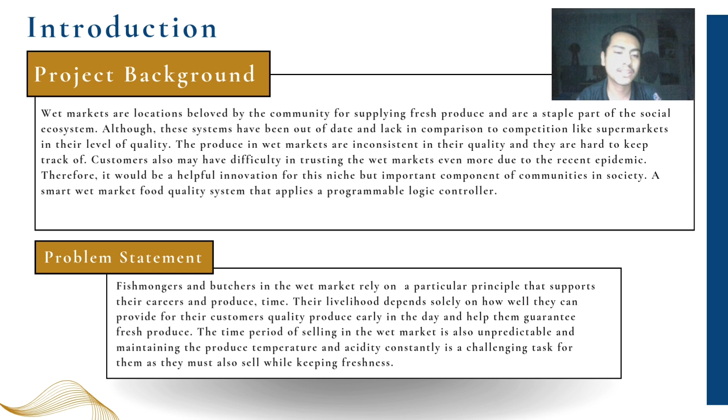The time period of selling in the wet market is also unpredictable, and maintaining the produce temperature and acidity constantly is a challenging task, as they must also sell while keeping freshness. Now moving on to the objectives. The first objective is to monitor the shelf life and condition of the wet foods throughout the operating hours by implementing temperature and acidity sensors. The second objective is to notify the trader of the shelf life and condition of the wet foods by installing alarms based on the conditions of the wet foods.

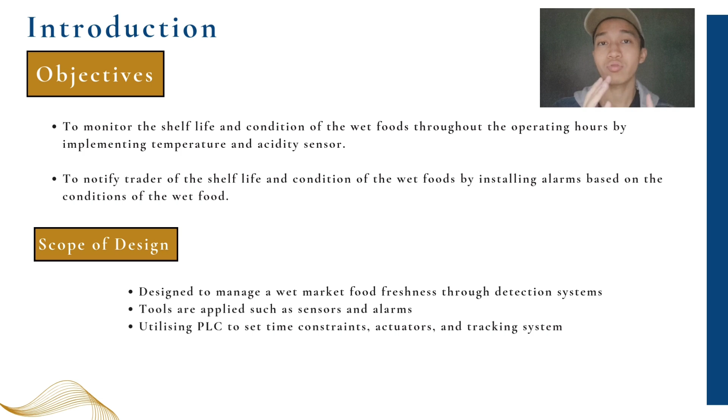Now, diving into the scope of design. This project is designed to manage wet market food freshness through a detection system in the holding area of the meats. The tools applied are an acidity sensor, a temperature sensor, along with alarms for each sensor and for the whole system, also utilizing the PLC to set time constraints, actuators, and tracking systems to ensure the freshness and quality of wet market produce.

There are 4 different capabilities of the smart wet market food quality system. The first is it can detect temperature change and dispense ice to cool down the wet food or ingredients. Next, it can detect the pH value of the wet foods or ingredients, which will trigger the pH alarm and notify the trader or owner when the pH value is too low.

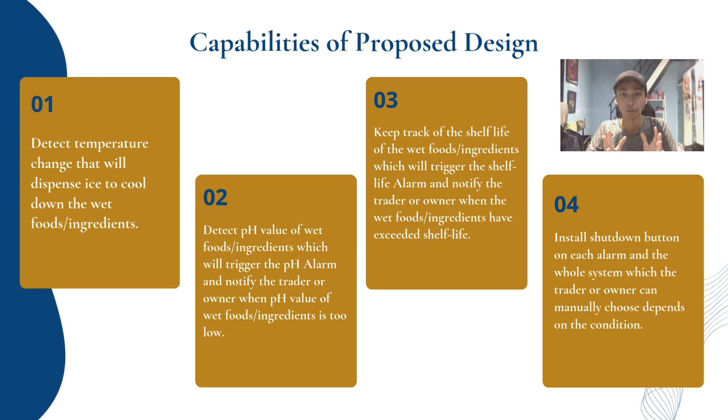Next, it can keep track of the shelf life of the wet food or ingredients, which will trigger the shelf life alarm and notify the trader or owner when the wet food or ingredients have exceeded shelf life. Lastly, it has a shutdown button on each alarm and the whole system, which the trader or owner can manually choose depending on the condition.

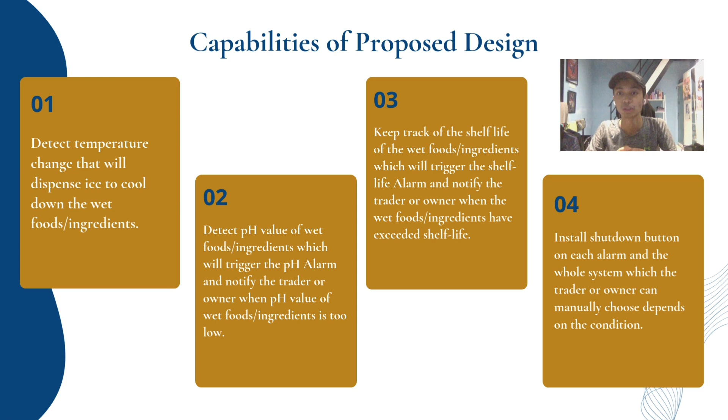There are 2 different parts of the literature review that we're going to look at. The first is the programmable logic controller, also known as the PLC. A control system must be developed so that the automation part is easily programmable, versatile, durable, and cost-effective. PLCs are computer-based, single processor devices that emulate the behavior of an electrical ladder diagram. PLCs are capable of controlling many types of industrial equipment and entire automated systems.

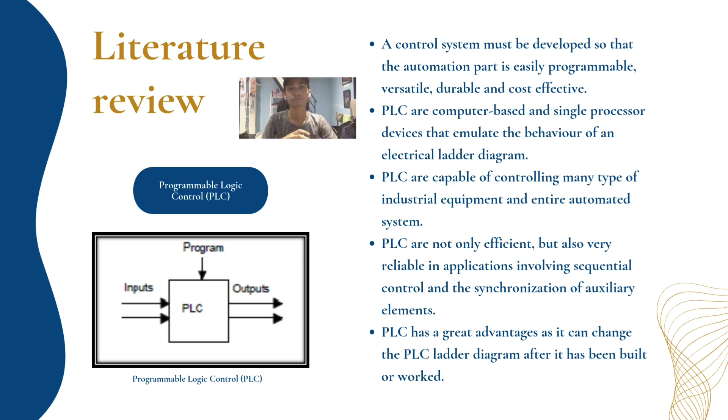They are not only efficient but also very reliable in applications involving sequential control and the synchronization of auxiliary elements. The PLC has a great advantage as its ladder diagram can be changed after it has been built. The next part of the literature review is actuators. There are 3 different types of actuator: electrical, hydraulic, and pneumatic. All actuators are restricted due to their size, complex auxiliary equipment, frequent need for maintenance, and sluggish environment in renewable applications, except for the electrical actuator.

Actuators are a vital component of any physical system, enabling movement by converting an energy source into another, for example, electrical, air, or hydraulic. The major applications of actuators are in the automotive industry, furniture ergonomics, automation, industrial machinery, etc.

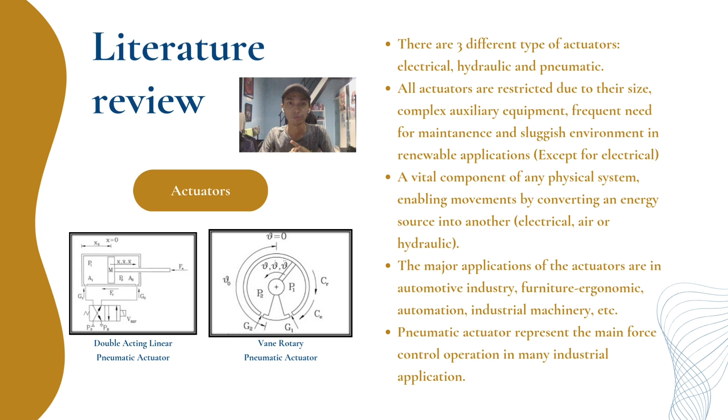Our smart wet market food quality system consists of 7 major components, which are the PLC controller, start button, stop button, alarm stop button, sensors, actuators, and a timer. The PLC controller manages the entire system of the smart wet market food quality system. The start button initiates the PLC system for monitoring and temperature control.

The stop button shuts down the PLC system for emergencies or during downtime. The alarm stop button shuts down the shelf life alarm notification after produce exceeds the duration. The sensors are the acidity sensor, which measures the pH level of the produce, and the temperature sensor, which monitors the environment temperature of the produce.

Actuators: the main alarm to indicate acidity and temperature if out of control, the shelf life alarm to notify that the produce is expired, and the ice dispenser to reduce the temperature or neutralize the pH levels. And the timer tracks the produce duration and triggers an alarm after exceeding its shelf life.

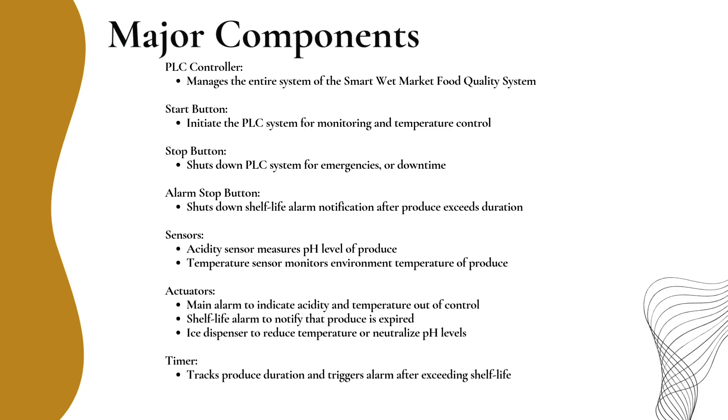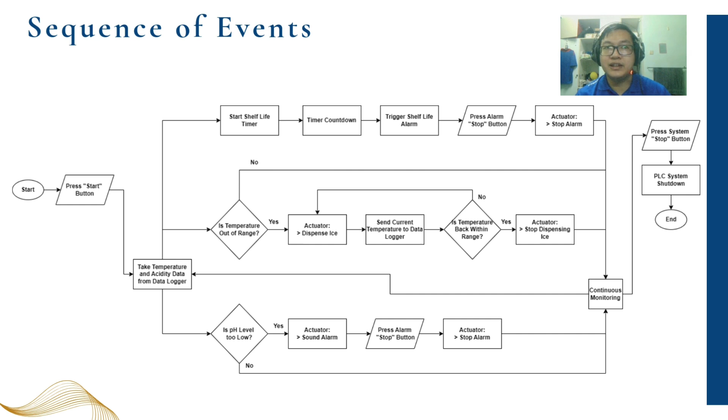If there is any problem, or you just want to shut down the system for the day, you can just press the stop button and it will cause the PLC system to shut down. And that is the sequence of events.

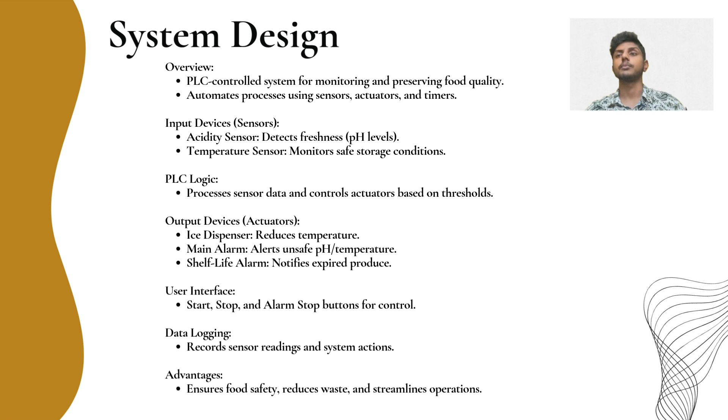So I'll be talking on the system's design. The overview is a PLC control system for monitoring and preserving food quality, which automates processes using sensors, actuators, and a timer. The input device sensors are the acidity and temperature sensors, to detect freshness from the pH levels of the food and to monitor safe storage conditions. The PLC logic processes sensor data and controls actuators based on thresholds.

The output devices are the actuators: the ice dispenser, the main alarm, and the shelf life alarm, which reduce the temperature, alert if there's an unsafe pH or temperature value, and notify of expired produce. The user interface is simple: start, stop, and alarm stop buttons for control. The data logging records sensor readings and system actions. The advantages are ensuring food safety, reducing waste, and streamlining operations.

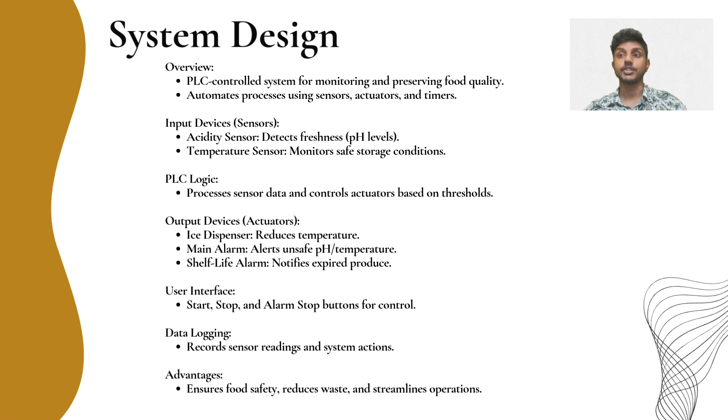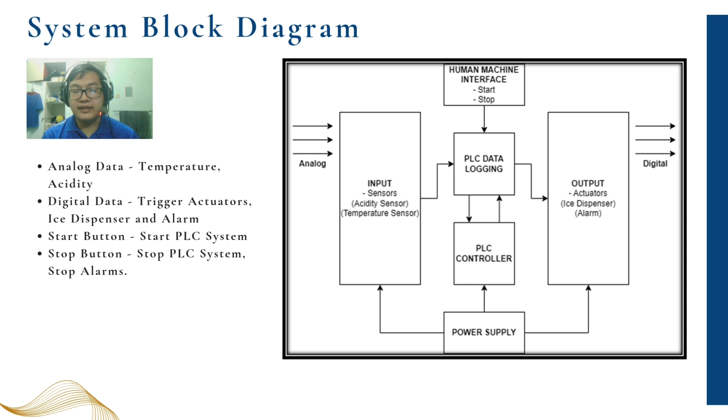And in terms of how the human machine interface works, we have the start button to start the entire system, and we have three different stop buttons. The first stop button will shut down the entire system when we need it, and the other two will stop the shelf life alarm and also the pH value alarm.

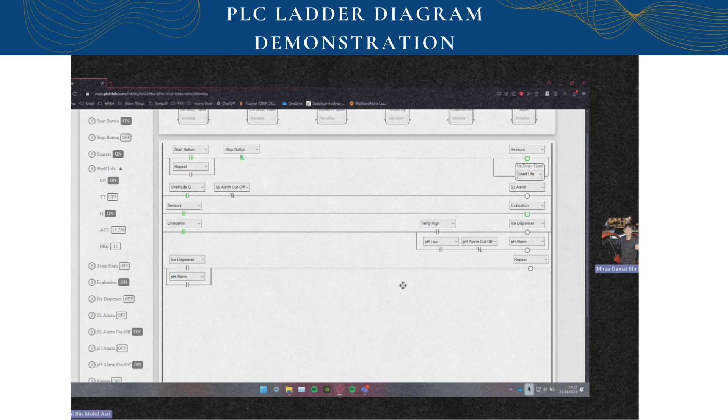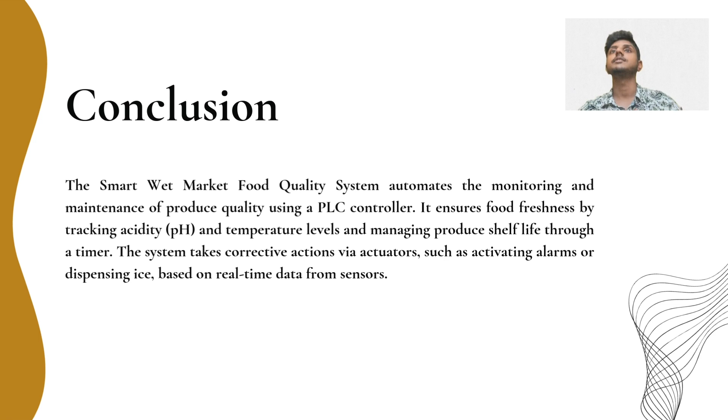So the conclusion we can make from this project is the smart wet market food quality system automates the monitoring and the maintenance of produce quality using a PLC controller. It ensures food freshness by tracking acidity, pH, and temperature levels and managing produce shelf life through a timer. The system takes corrective actions via actuators such as activating alarms or dispensing ice based on real-time data from sensors.